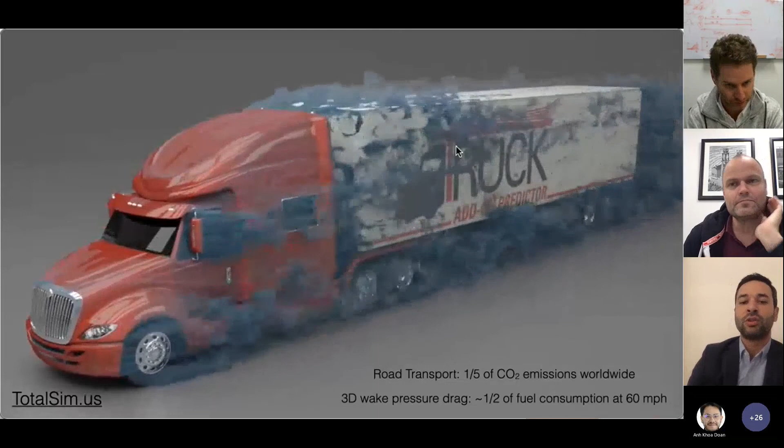So to start, the motivation was large-scale coherent structures in turbulent wakes, and specifically the automotive industry. I'm showing this simulation to emphasize the complexity of the flow around the vehicle, but also the fact that most of the drag is produced in the near wake of this vehicle at highway speeds. So we spend more or less half of the fuel to move this vehicle to overcome the aerodynamic losses due to the pressure drag in the near wake.

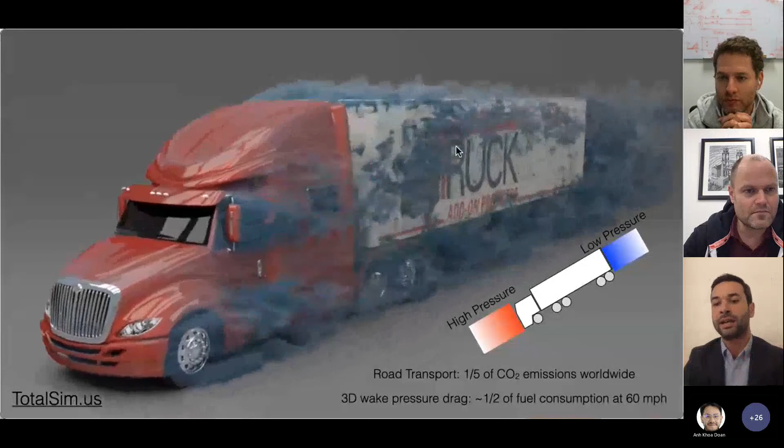And because this drag arises from the pressure difference between the front and the back, any attempt to increase the aerodynamic efficiency should alter the properties in the near wake. So in the low pressure region, we're trying to push the pressure high and equilibrate this pressure difference.

So there are different approaches. The first one is passive approaches - we improve the aerodynamic design. We can see this can improve a lot also the electric range anxiety in electric vehicles by changing the drag coefficient. Tesla was able to increase the range of their cars by 50 miles.

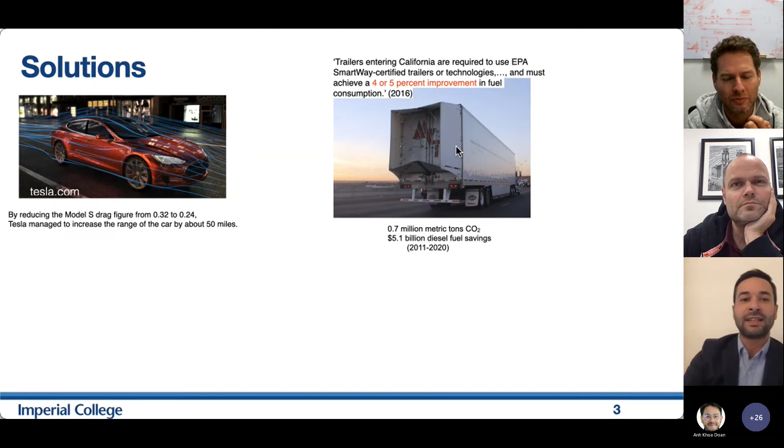In California, when I was there, I used to see these vehicles. We don't see them in Europe because we don't have these regulations yet, but they might come soon, where by law you're enforced to have aerodynamic devices in vehicles that can achieve 4 or 5% reduction in fuel consumption. And the reason these are the only devices we see on trucks is really simple.

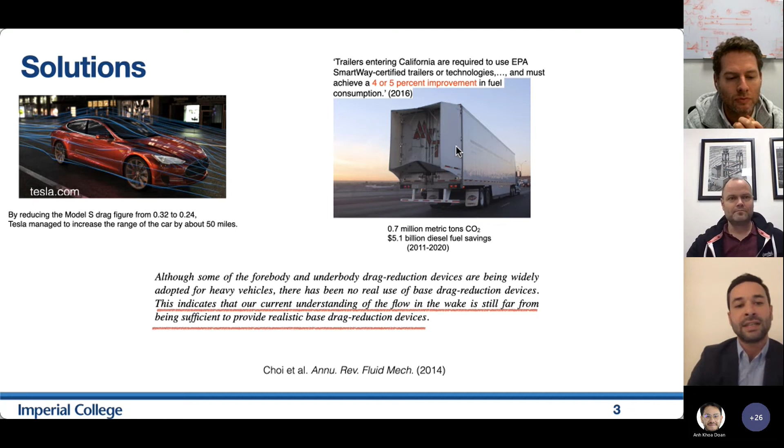It's because we cannot understand the turbulent dynamics of the wakes. This is really well summarized in a sentence from the recent review of Choi, that there is no real use of base pressure drag reduction devices due to the lack of understanding of the flow in the wake. So we cannot really have realistic base drag reduction devices.

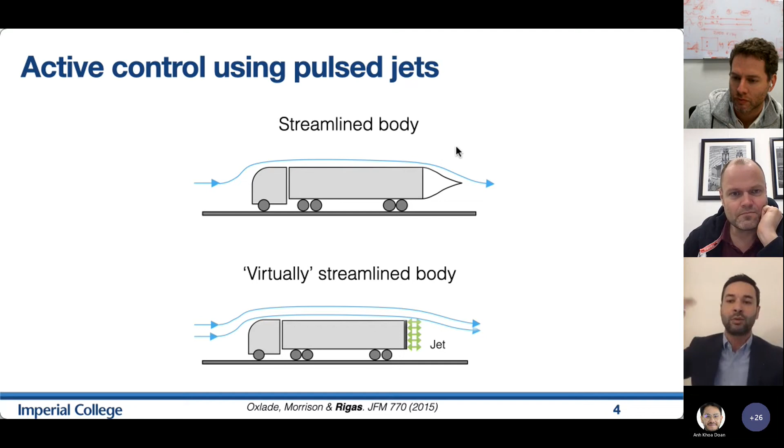So one of the approaches we attempted back when I was a PhD student, with another PhD student working there, Anthony Oxlade, was instead of using surfaces to passively streamline the body, why don't we use active control? So we use a set of jets in the rear of the car that pulsate with high frequency, high amplitude, and create virtually a streamlined body by manipulating the flow in the rear wake.

So the Reynolds number is 200,000 based on the diameter, fully turbulent regime. And we drive the speaker at different amplitudes, or jet momentum coefficients, and different frequencies.

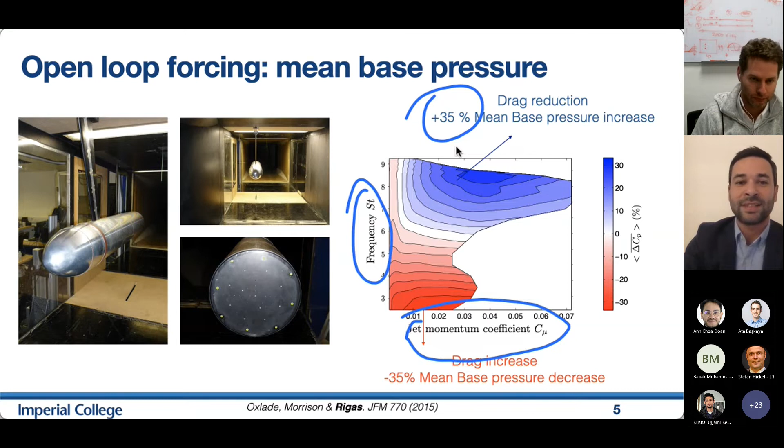When we measured the power actually required to drive these jets, we found that the efficiency was approximately 1, so more or less what we spent to drive the actuator was consumed to reduce the drag of the body. So it raises the question, is that a realistic or practical approach to reduce the drag?

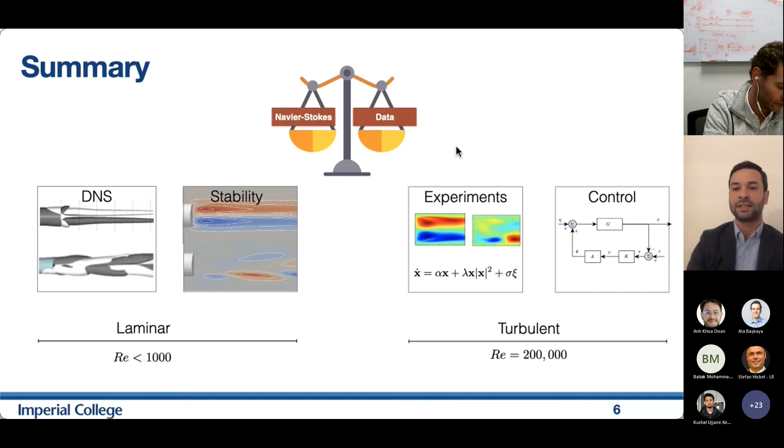So then we took a break, went back to the office, and started thinking more about the dynamics of the wake. What I'm going to show you today is our current understanding of the flow structures, which motivated some experiments we did at high Reynolds numbers, and also some more sophisticated control that we applied a few years ago and revisited nowadays with more modern techniques like reinforcement learning.

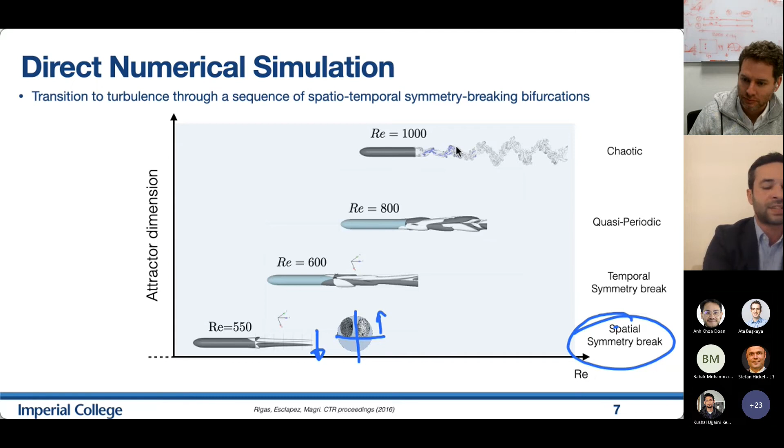The first one being a spatial symmetry break, so the wake, instead of being rotationally symmetric, is shifted towards one side. If we plot the vorticity in a plane near the base, we can see the wake has shifted off center, and there is a lateral force, such that the center of pressure, for example, would be off the center of the body.

If we keep increasing the Reynolds number, we see a second bifurcation. We lose temporal symmetry. Instead of time being a continuous direction, it becomes a periodic direction. In that case, we have the typical vortex shedding, with a peak in the near wake at a Strouhal number of approximately 0.12.

After that, if we keep increasing the Reynolds number, the flow becomes quasi-periodic and fully chaotic. And at high Reynolds number, it becomes fully turbulent.

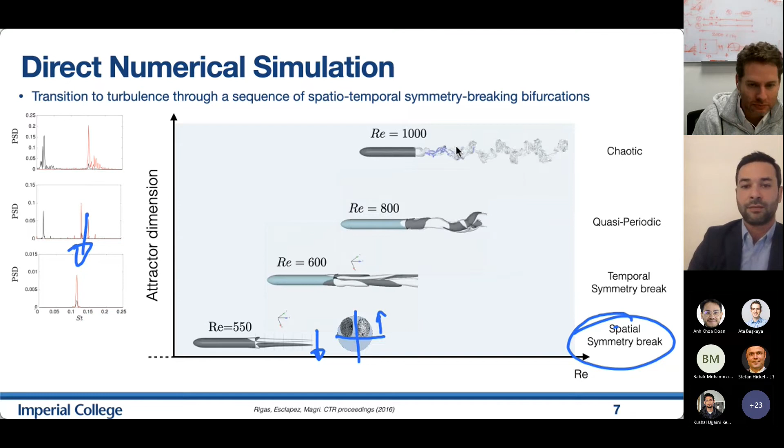To understand these regimes, we performed a linear stability analysis, starting from an operator-driven approach. We have the Navier-Stokes equations, which we linearize around a base flow. We find this base flow by solving the steady Navier-Stokes equations. These are nonlinear equations, and we use a Newton method to find equilibria known as fixed points or base flows.

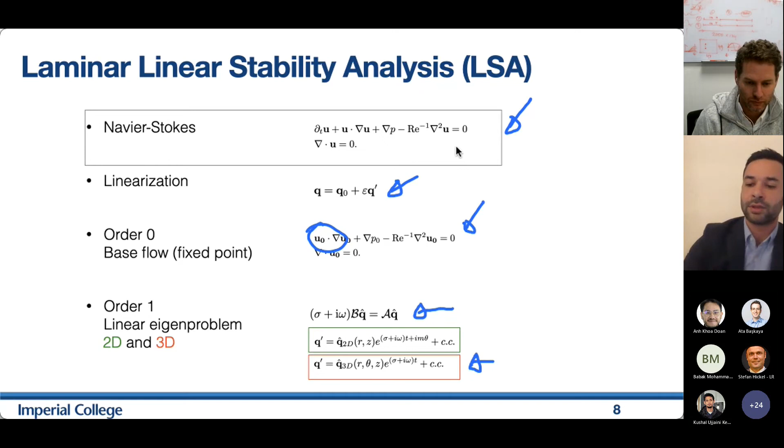Once we have such an equilibrium, we can solve an eigenvalue problem for this base flow to see if there are unstable eigenvalues associated with the symmetry-breaking phenomena. Because the flow is three-dimensional, at some point we have to solve a fully three-dimensional stability problem, so we discretize in all three directions and find eigenvalues of this large-scale system.

Starting at low Reynolds number, we have a fully axisymmetric flow. This is the base flow whose stability we examine. At some point, if we plot the spectrum, we see an eigenvalue crossing the imaginary axis. It has a zero frequency. This corresponds to a steady eigenmode, associated with a pitchfork bifurcation that breaks the rotational symmetry, which we also showed in the DNS calculations.

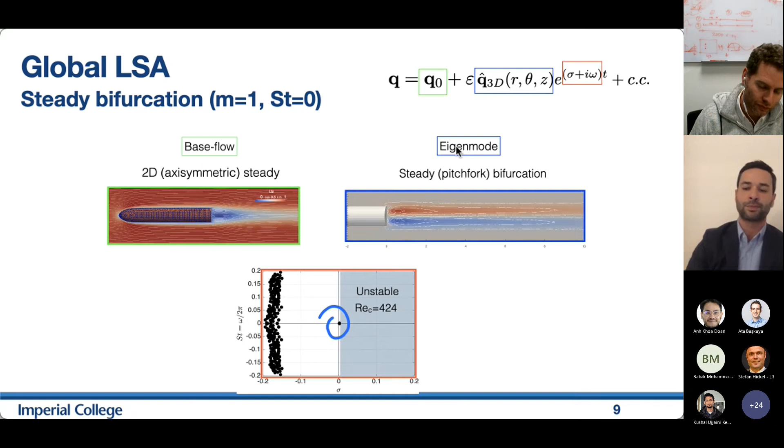What happens is that this is just the linear mode. It tells me the eigen direction of the growth of this instability, but the final saturated regime, which is steady and non-symmetric, can be found by taking this eigenmode, the unstable eigen direction, throwing it back into the solution, and iterating with the Newton-Raphson method. We end up with a new three-dimensional asymmetric solution, as you can see here.

This is a typical spontaneous symmetry-break phenomena. Originally all the solutions were symmetric, but because of the symmetry break, the original axisymmetric flow became asymmetric, breaking the rotational symmetry. This azimuthal direction in that potential well can be chosen arbitrarily based on the initial conditions for the stability analysis; somehow we have to fix this angle, otherwise it causes degeneracy. Now the fully stable state is the one we see here, and we can continue the stability analysis.

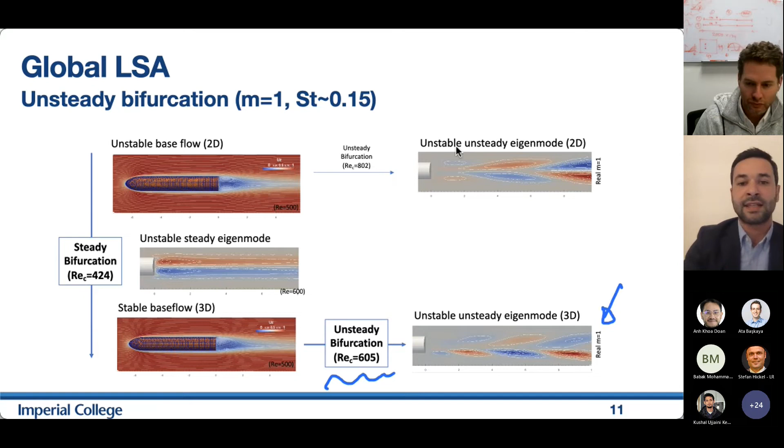Now we examine the stability of this fully three-dimensional steady flow, and we find an unsteady bifurcation at approximately Reynolds number 605. The vortex shedding mode we plot on the right-hand side is asymmetric, and it has inherited the symmetry properties of the original asymmetric base flow. Again, this is a linear eigenmode—it doesn't tell us anything about the saturated state, and this is where weakly nonlinear analysis comes in.

I'm not going to go into details about that, but what I want to emphasize is that instead of stopping at first order, which would be the linear order, if we continue at higher orders, we can get some expressions known as Stuart-Landau equations describing the amplitude evolution of the most unstable mode during the saturated regime. I want to emphasize that these are exact solutions at the order of truncation, meaning that if I throw them back in the Navier-Stokes equations, they give a zero residual given the accuracy of the truncation.

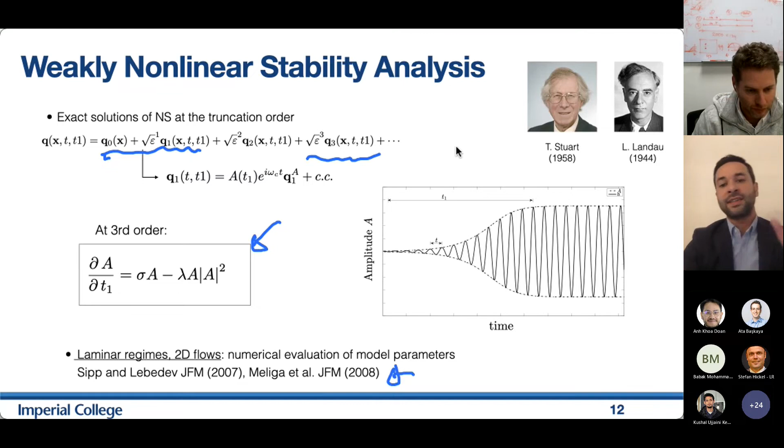Many other groups have extended these techniques to fully three-dimensional wakes like spheres. This summarizes the dynamics at the laminar regime. Unfortunately, the tools are not so evolved to take the same approach and apply it in the turbulent case.

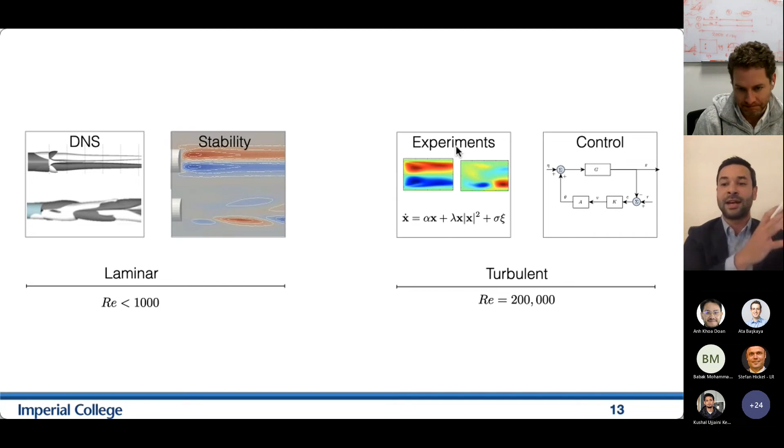So what we actually did is we went to the wind tunnel and performed a series of experiments to understand what are the dominant dynamics. What I'm going to try to persuade you today is that exactly the same transitional dynamics we see in the laminar regimes can be observed also at high Reynolds numbers. One of my PhD students, co-supervised with Jonathan Morrison, recently did a follow-up experiment of the original experiment we had performed, doing time-resolved two-component velocity measurements in the near wake.

We can see here a visualization of this flow field. The flow is fully turbulent, Reynolds number approximately 200,000, and the separated boundary layer before the trailing edge is fully turbulent. We can see a wide logarithmic region developing before separation.

And this is the pressure measurements. We can get pressure measurements, as we did originally a few years ago, in the near wake, in the base pressure, using 64 pressure taps.

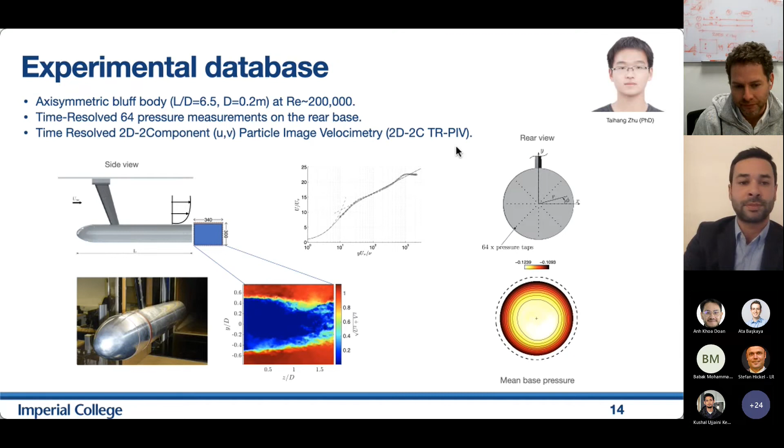So I will just summarize, or remind some of you who might have seen these results before: we started with a base pressure analysis and performed an azimuthal decomposition because we have 64 azimuthally distributed pressure sensors. We plot the power spectral density of each azimuthal mode, and we plot them in a pre-multiplied spectrum, such that the area we see corresponds to energy.

This is really convenient to understand where coherent structures happen, but sometimes it might be misleading because some peaks we see are actually not periodic solutions, but just regions of high energy. So the peaks we identify: the first one is the typical vortex shedding peak at Strouhal 0.2 with azimuthal wave number m equal ±1. This is straightforward. And we see another peak at approximately Strouhal 0.1 associated with an axisymmetric pulsation of the whole wake, the bubble pumping mode.

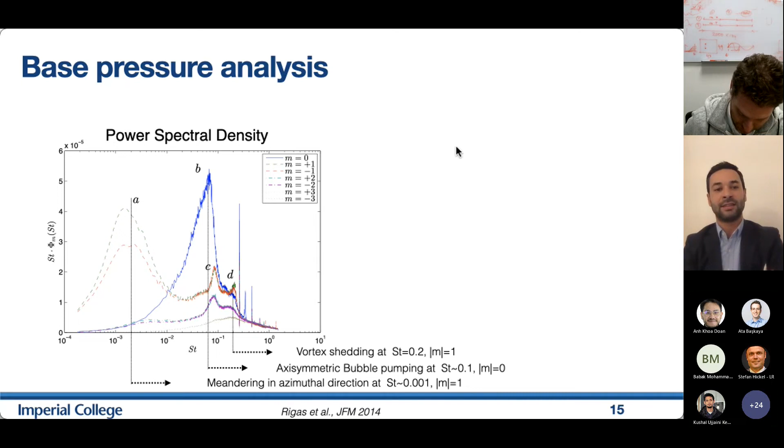Back in 2014, we also saw a strange peak at approximately 100 times lower frequency than the vortex shedding mode. To be honest, the first time we saw that peak, we said okay, there is something wrong with the experiment. So we had to change 3 or 4 wind tunnels, revise the experimental setup, try different perturbations, until we realized that there is something dynamically associated with this peak.

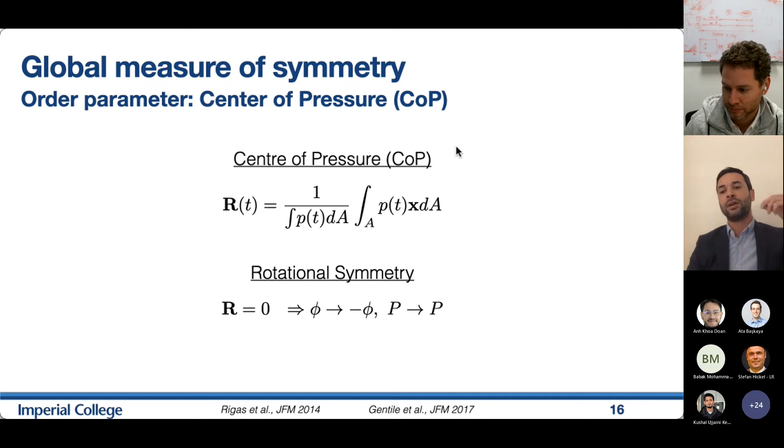So to understand where this peak is coming from, inspired by the stability analysis results, we defined the center of pressure to give us an order parameter of the symmetry break in the near wake. This has some nice symmetries: if the flow is rotationally symmetric, the center of pressure will have a zero value, meaning the total force on the body is at the center. Whereas if the value is non-zero, it will be off-center, meaning we have a symmetry break.

And we plot the PDF of that in the 2-dimensional base of the body. We were quite surprised to see that most of the time we achieve a non-zero center of pressure, which means that most of the time the wake has a broken symmetry. We said, okay, probably we're going somewhere here — these dynamics might be related to the ones observed in the laminar regimes related to the symmetry-broken mode. So to show that, we took all the snapshots of the pressure measurements and rotated them based on the azimuthal angle of the center of pressure.

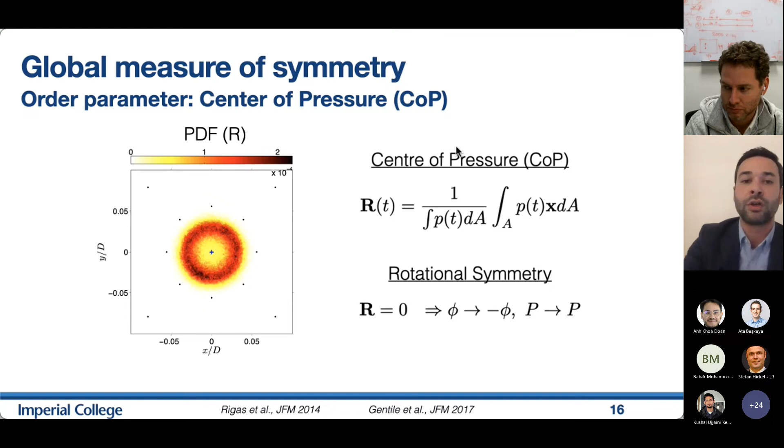So we performed a conditional averaging based on the center of pressure, the azimuthal angle of the center of pressure. On the top, we see the average pressure field, which is axisymmetric, as expected, since fully developed turbulence recovers all the broken symmetries.

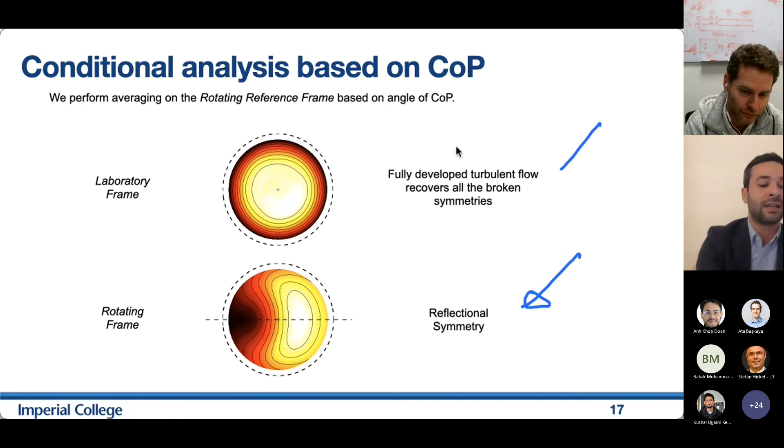But on the bottom side, we actually recover the steady symmetry break that was found in laminar regimes, but now exactly the same mode was found at high Reynolds numbers, sharing the reflectional symmetry property of the symmetry broken structure we expected to find. What happens is that this structure at high Reynolds numbers doesn't stay at a specific angle, it randomly reorientates, and due to ergodicity, we recover at the long time average the full axisymmetry in the near wake.

Why would you care about that? Because symmetry break is associated with drag. There is a direct relationship between the center of pressure and the pressure coefficient, or equivalently the total drag of the body.

So with the brown, I'm showing the radial PDF of the center of pressure, so the most probable symmetry broken direction is this one. And if we conditionally average now the base pressure, or the drag, which is a measure of the drag on the body, we see that we have a high drag, or equivalently low pressure coefficient.

Any attempt to increase the base pressure would probably imply a symmetrization technique. So we would like to achieve a zero center of pressure in order to increase the base pressure and reduce the drag.

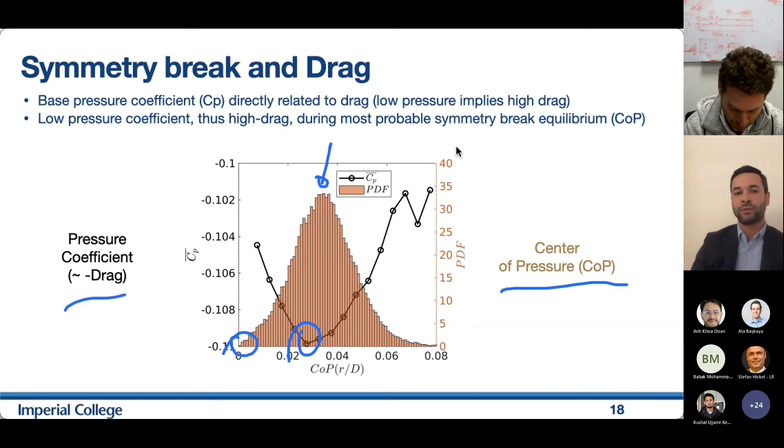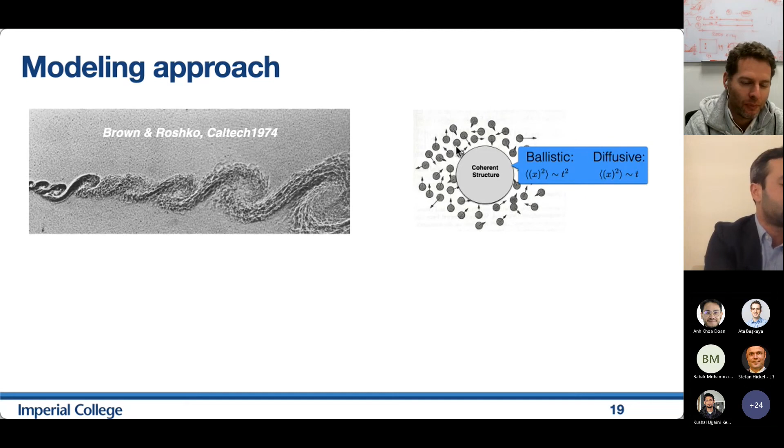These observations also motivated the modeling approach, because to perform control, we need a model as well. The inspiration came from one of the very characteristic visualizations that Brown and Roshko produced: the mixing layer that we can see in a transitional mixing layer, an instability developing and persisting all the way to fully turbulent regimes.

The only difference is that some diffusion and some stochasticity are introduced in that case. So we can think of the coherent structure, which corresponds to the symmetry broken state, as something like a large scale structure swimming in a bath of fluid. And if we think about it this way, this is the definition of a Brownian motion.

What we decided to do is take all the models that we had for the transitional regimes and add some Brownian motion to see how far we can go with that. How do these models look like?

They share the same properties as the ones from the laminar regimes. These are the weak nonlinear models, and we add white Gaussian noise, so this is a Langevin equation, a stochastic differential equation perturbed by sigma xi, which represents in a phenomenological way the influence of the stochastic turbulence produced either by the wake itself or by the incoming free stream.

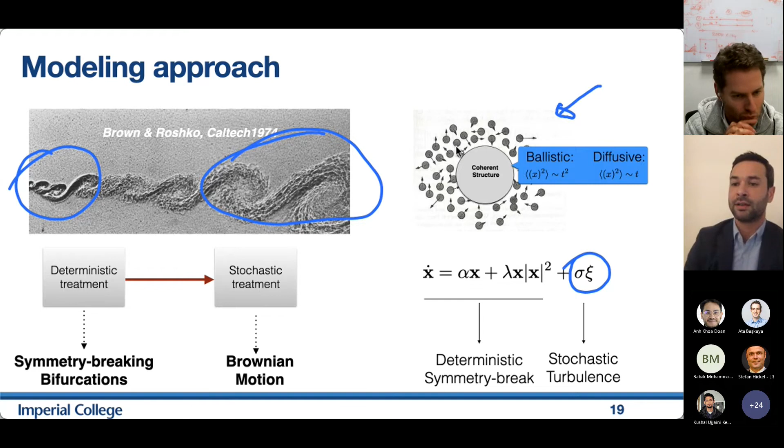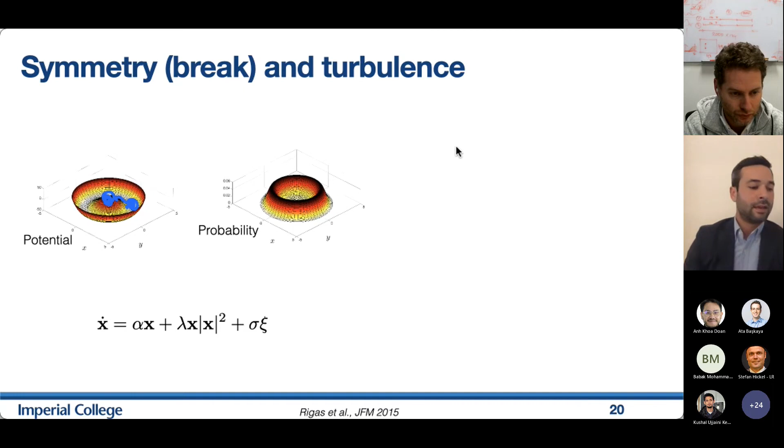In the turbulent regime, of course, the flow will never be steady, so it will be unsteady and unstable. A ball at the center of the potential would fall down, and because of the random turbulence and ergodicity, it would reorientate randomly, both in the azimuthal and radial directions, until we achieve a probability density function that is the one we have on the right-hand side.

How well do the predictions compare with the experiment? They compare quite well quantitatively and qualitatively. Here we see a comparison of the PDFs.

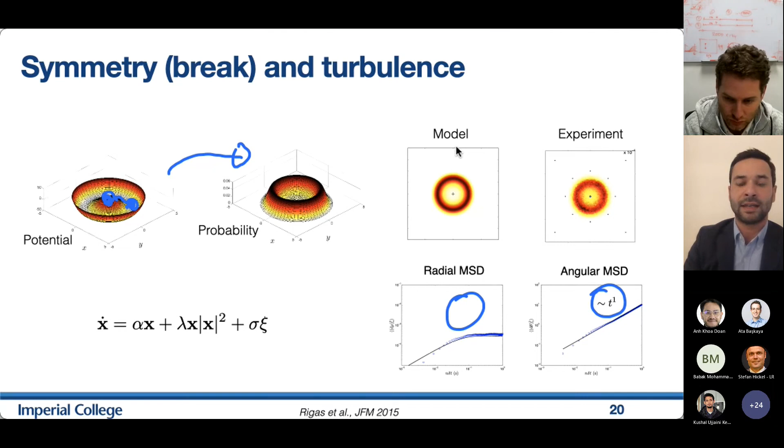Of course, in the radial direction, due to the curvature of the potential well, we cannot explore all the time scales like in the azimuthal direction, and the mean square displacement saturates, which is also perfectly predicted by these models. These models were only for rotational symmetry, but they can be extended for any kind of symmetry in the experiment, like D4 or D3.

For example, a car would have a D4 or D2 symmetry. And now, instead of multi-stability or a continuous symmetry group and a continuous solution, we can have discrete solutions or discrete equilibria that are equally explored, again due to ergodicity in our system.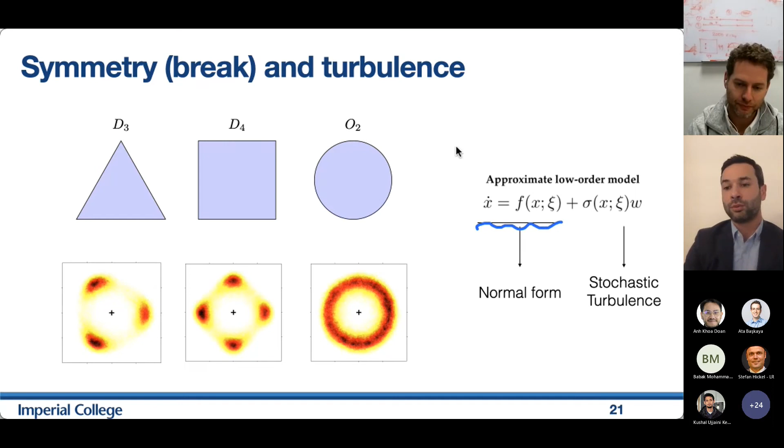Okay, so these normal forms can be derived to describe the deterministic part, either based on first principles or based on symmetries. However, in many cases we might not know the functional form of this equation, and this can remain unknown. This is where modern data-driven techniques can come in.

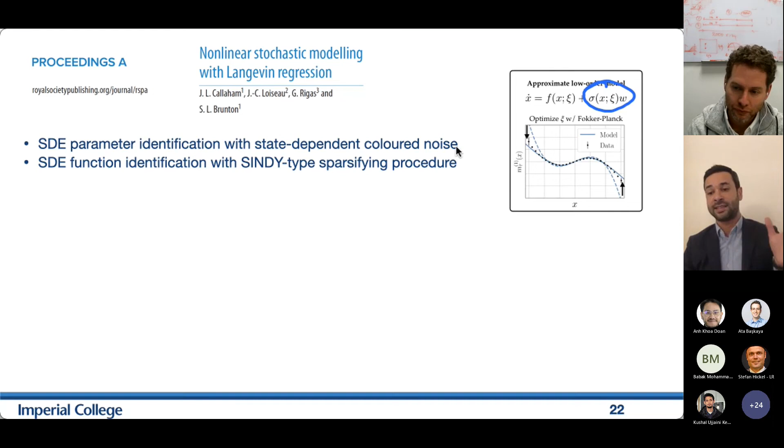Earlier this year we published a paper with Steve Brunton and his group on how to identify stochastic differential equations, but with a difference: we can have arbitrarily defined noise that we can also discover, and this noise doesn't have to be white Gaussian. It can be any kind of colored noise, and it can also have a state-dependent function.

We did that for the experimental results of the bluff body, and quite interestingly, we recovered exactly the functional form for the deterministic part that we expected. But for the noise part, we saw that we can achieve an improvement if we have state-dependent noise. We think this is something interesting that might be worth further study in the future.

Just very briefly, how we would derive these functional forms: we use a SINDy type of sparsification. We have a dictionary of all the possible polynomials that can describe this normal form, and based on a sparsifying procedure, both for the stochastic part and the deterministic part, we can choose the number of modes such that the prediction of the model matches the prediction of the data in the best possible way.

And this is all the story about the pressure data. Now I'm going to move to the velocity data and the results from the near-wake experiments.

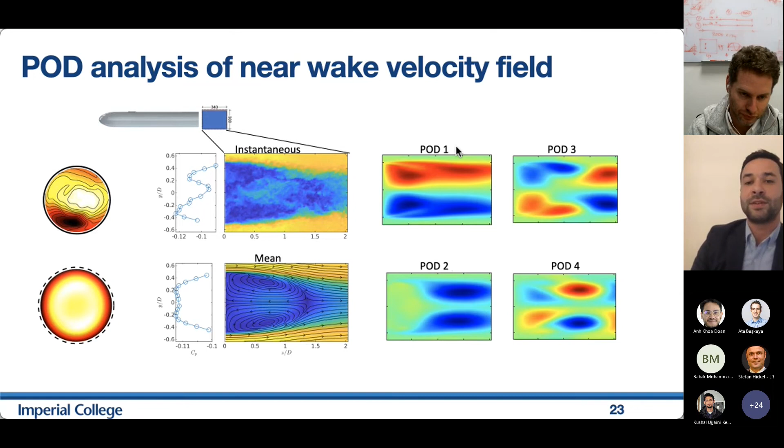So these are the POD modes. We can see that the first few POD modes are very coherent, in contrast to the completely random wake that we have instantaneously. To understand a bit more the dynamics of these most energetic coherent structures, we plot again the power spectral density of the amplitude coefficients associated with these modes.

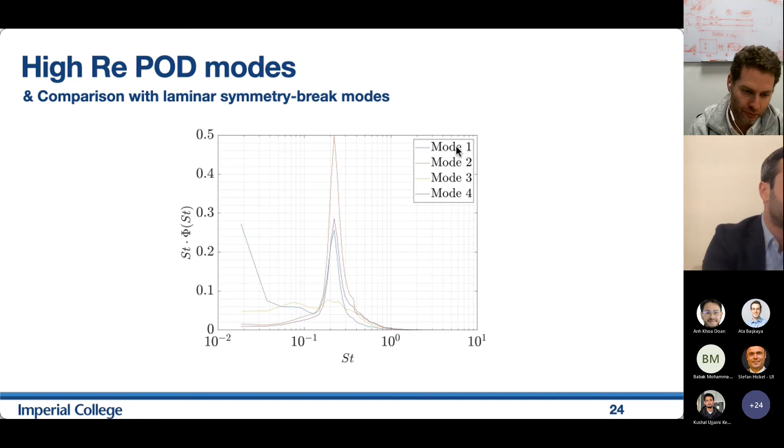The first mode, the most energetic velocity mode, actually has a low frequency component approaching Strouhal 0. This mode is visualized here, and it compares very well with the one that we found from stability analysis at the low Reynolds numbers.

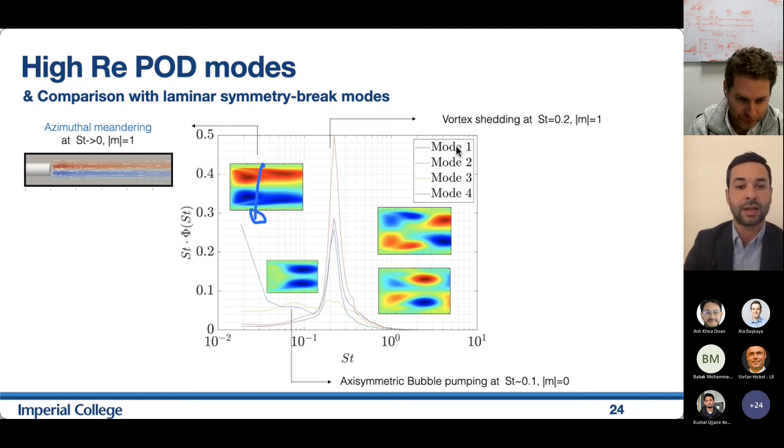The mode on the left is the one identified at Reynolds number 500. The one on the right is the one at 200,000 from the PIV measurements. We see two more modes at Strouhal number 0.2, which is a traveling mode giving rise to the Karman wake, and also the axisymmetric bubble pumping mode, which is a symmetric mode, at a frequency approximately 0.1 and a bit lower.

However, there is a caveat here: the nonlinear structures we found are non-symmetric, meaning only the linear ones are symmetric. This raises the question: do the POD modes we found actually represent the true physics of the system, since they are symmetric but the underlying dynamics are asymmetric? And of course, the answer is no.

To address that, we performed a conditional POD analysis of the velocity data. In the same way we conditioned the pressure data based on the angle of the center of pressure, we conditioned the velocity data, the state of the wake, based on the amplitude coefficient of the first POD mode, which defines in a way the symmetry break state.

Some of the time, when this amplitude coefficient is positive, the wake will be on the top side, deflected towards one side. The rest of the time it will be on the other side. If we do a conditional averaging based on this procedure, we can recover the two truly asymmetric states that can actually be observed in the nonlinear solutions of the Navier-Stokes equations.

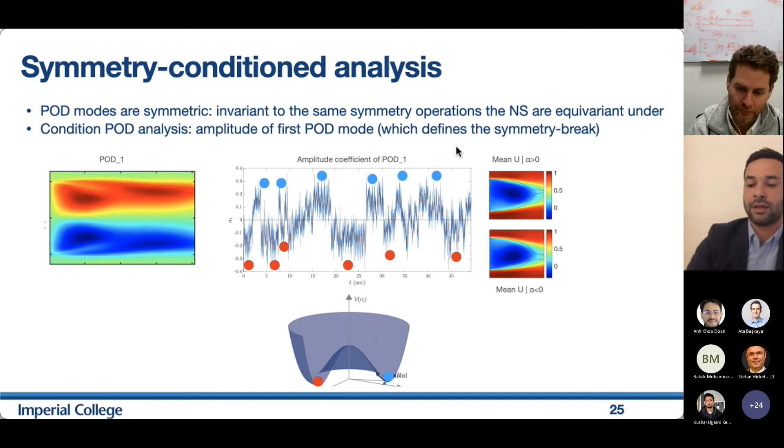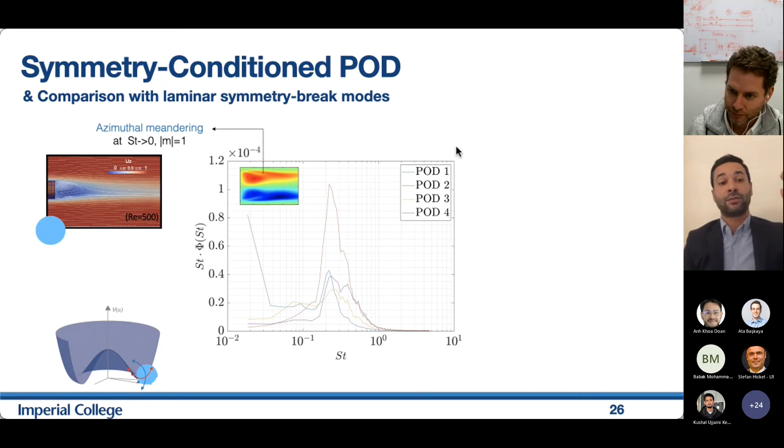We can do that also for the POD modes specifically, and here I'm going to show you the conditionally averaged POD modes based on the symmetry properties of the wake. The first one corresponds to the azimuthal symmetry break, now asymmetric. It's not very evident, but the blue is not the same as the red, and this gives rise to this tilted wake towards one side.

The vortex shedding mode is more pronounced now with the conditional averaging, one-sided because the wake has been conditionally averaged to be only on one side. So we can see the vortex shedding inherits the same symmetries, and it compares very well now with the true wake mode that we found from the stability analysis.

We can give another interpretation of the bubble pumping mode. Although the low frequency mode we found is the low frequency reorientation in the azimuthal direction, we have another diffusive time scale corresponding to oscillations in the radial direction of the center of pressure of the wake, due to broken symmetry dynamics. So we can think of the bubble pumping mode as a radial meandering of the whole wake, stochastically exploring both the azimuthal and radial directions due to broken symmetries.

So that summarizes our most recent understanding of turbulent wakes using both pressure and velocity measurements. The most important part is the persistence of laminar symmetry-breaking instabilities into fully turbulent regimes.

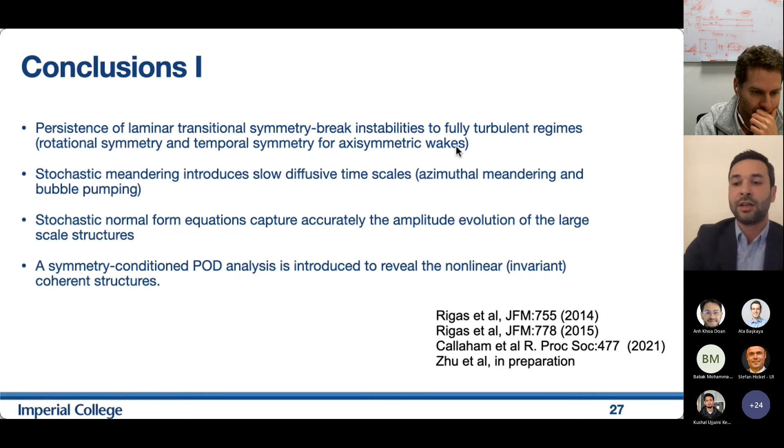The last part, the symmetry-conditioned POD, motivates the next part of my talk, which one of my other students, Simon, developed a sophisticated way to include any kind of symmetry, creating what is called the symmetry-aware proper orthogonal decomposition analysis.

The symmetry we had before was only rotational, but there are systems with many other types of symmetries, continuous and discrete, and these cause serious problems for modal decomposition methods.

So we're going to use POD implemented with autoencoders, using an encoder-decoder type architecture. We can prove that if we use a linear neural network with just one layer, this is exactly equivalent to performing POD. However, we can also go to the nonlinear regime, doing more sophisticated or compressed analysis of the flow by replacing the linear neural networks with nonlinear ones.

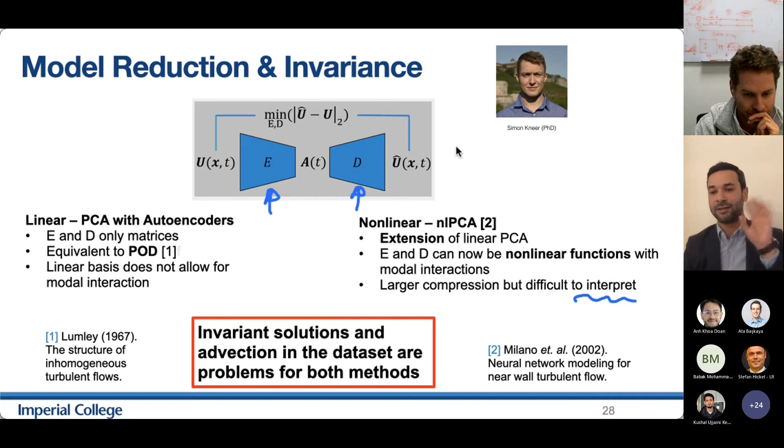However, in that case, we lose some interpretation of the modes because we don't have specific modes associated with these structures.

So I'm going to define what we call an invariant solution, and this is what gives trouble to POD. Specifically, we have a set of partial differential equations, like on the left-hand side in compact form, that are equivariant under a symmetry group gamma. The right-hand side will satisfy this kind of relationship, giving rise to invariant solutions for the state U.

So meaning that if I have a symmetry, like a rotational symmetry, I can take my nonlinear solution, rotate it, and find exactly the same, and it will still be a solution of my system.

However, in POD, because of the ergodicity and exploration of all these possible symmetries, what ends up being the result does not correspond to the original nonlinear solution U. So somehow we would like to take into account the symmetry transformation in the POD analysis that I will show you now.

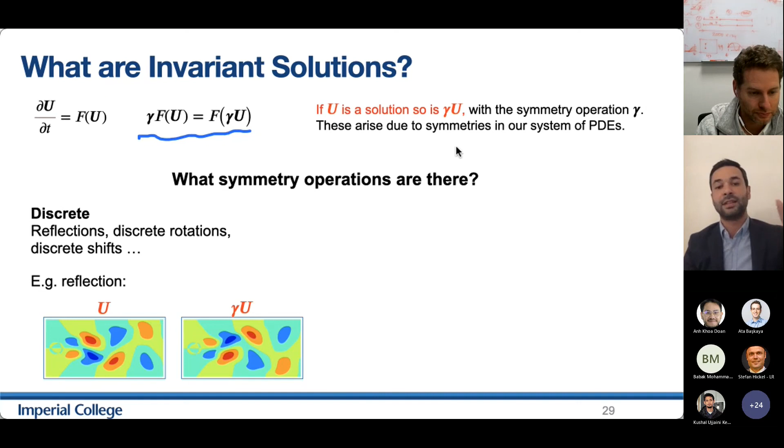These two types of symmetries for gamma correspond to discrete symmetries like reflections, rotations, or shifts. For example, here in the cylinder case, we can see the flow state reflected in two different instances in time.

Or we can have continuous symmetries. I showed you earlier rotation, but we can have also translation, which can give rise, for example, to traveling waves if we have periodic directions. Here is a snapshot for the Kolmogorov case, which I will show a bit later, of the same state translated by pi or pi over 2.

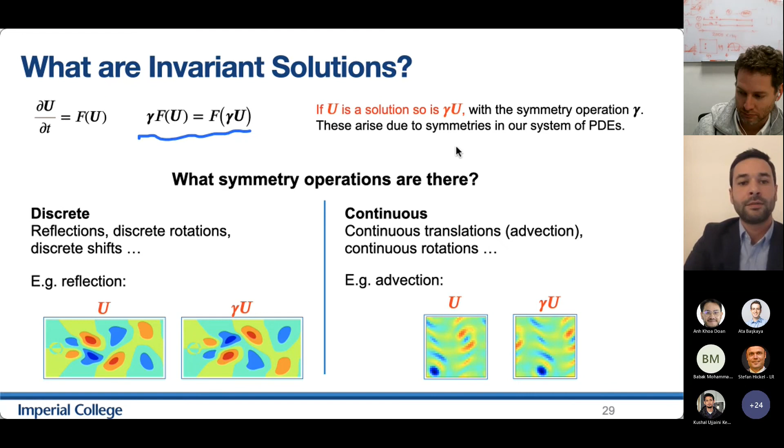Why do invariances cause a problem for model reduction techniques like POD? First, they bloat the latent space, in the sense that symmetry-transformed states which are equivalent get encoded in different locations in phase space. We don't need that, because it gives us much higher dimensionality in our system.

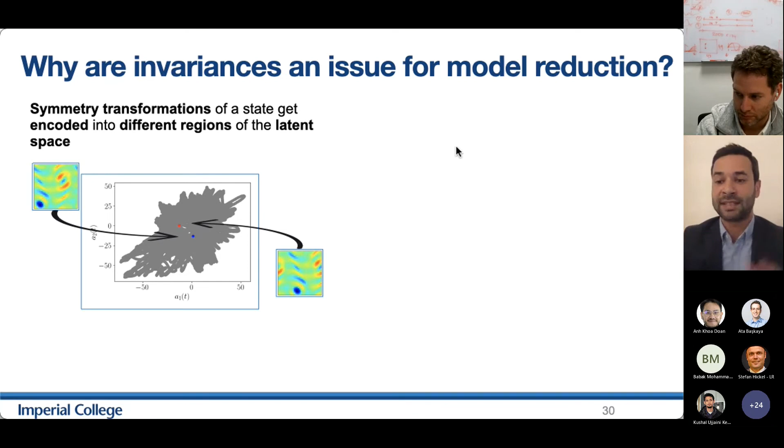But most importantly for us, trying to understand the underlying physics, is the fact that we lose interpretability when we do POD analysis in the case of symmetry. Why? Because when we have a periodic direction, we can prove that the POD modes become Fourier modes, and when we have symmetries, the POD modes also inherit the symmetries that the original system is equivariant under.

Simon actually came up with a really sophisticated yet simple way to do that with the autoencoder architecture. So what we're doing is we start with a snapshot X, and we encode the optimal shift. We discover it - this is a shift S that we have to translate the whole state in a periodic direction, for example in X, such that the reconstruction is optimal.

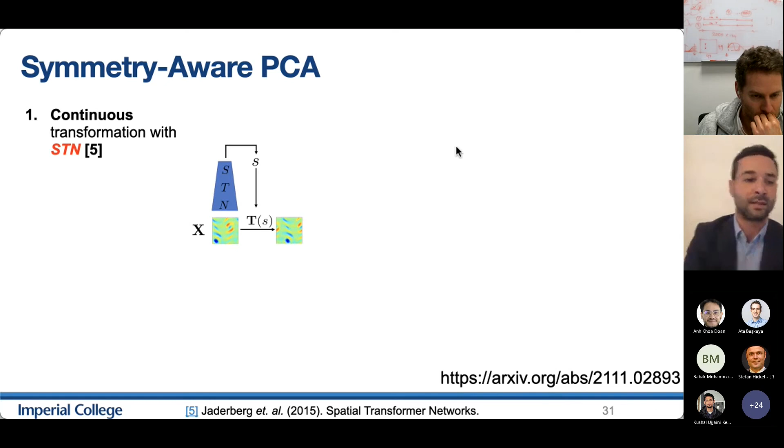For the discrete symmetries, we replicate the same autoencoder architecture by creating a set of Siamese branches. If we have a set of discrete symmetries, we produce, by applying the same symmetry group to the snapshot, a replication of all the possible states. During training, we pick every time the one that is closest, that gives us the lowest reconstruction error.

So then we just reconstruct back in the original space because we know which branch was selected and also what was the shift. We back propagate the reconstruction such that we minimize the weights of the encoder-decoder, and simultaneously we find the optimal shift such that the solutions become invariant in the continuous directions, but also invariant with respect to all the discrete solutions.

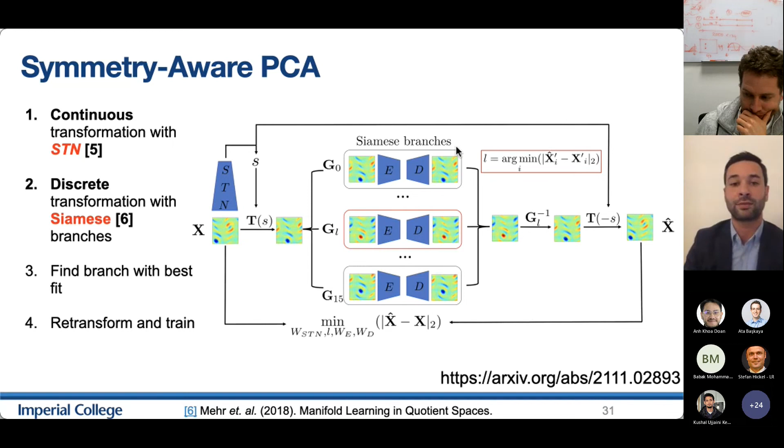So at the end of the day, the structures we discover here are invariant under the pre-specified symmetry group of operations that we have defined at the beginning of the autoencoding.

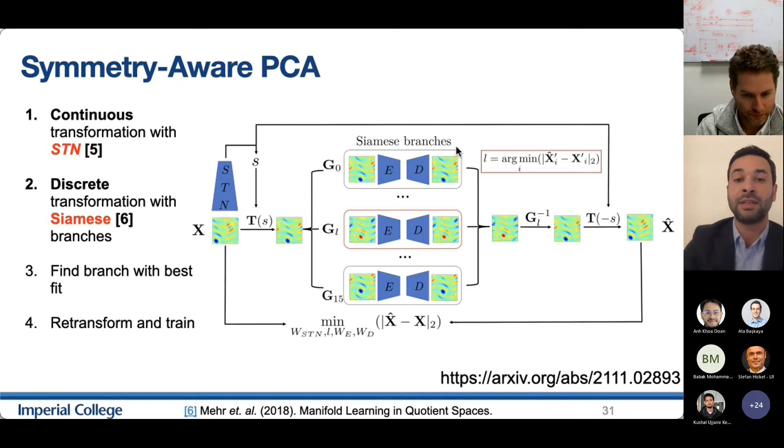We will demonstrate that in the Kolmogorov flow, which is a canonical case for studying rare events and very weak turbulence. It has periodic boundaries in X and Y, and here you see a rare event where the equilibrium solution is shifted after the rare event happens, in a completely different location, by approximately pi. It has many different invariances due to discrete symmetries and also continuous symmetries.

So the number of discrete symmetries is 16, because of the symmetry of the forcing and the rotation symmetry.

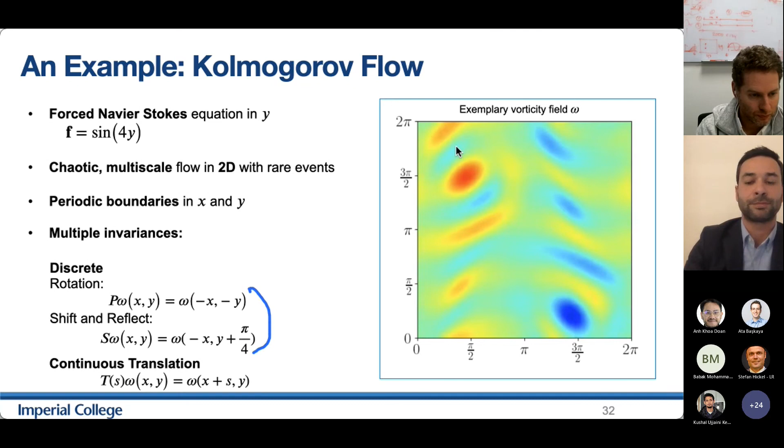So during the encoding and the decoding, the architecture would tell us which of the states were explored every time the encoder was shifting things, such that solutions become invariant in this phase space.

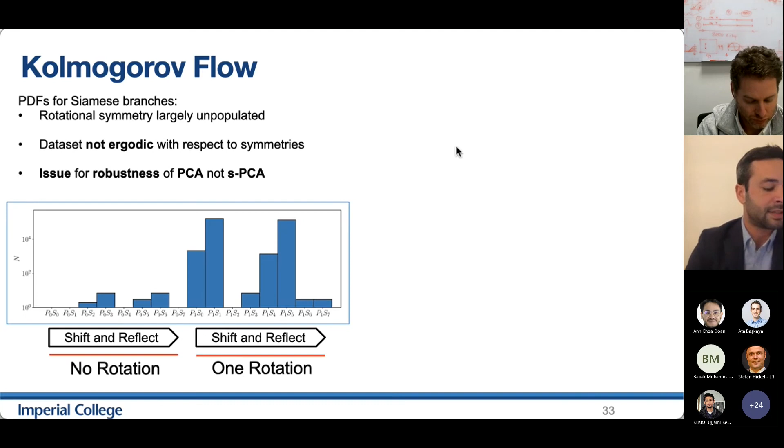This is the shift that the autoencoder is applying every time a new snapshot comes in, such that all the snapshots are aligned in the reduced space. There is a direct relationship, and we can prove that this method we're proposing is exactly equivalent to the method of slicing as well.

The interesting part is when we compare directly the modes from the linear symmetry-aware PCA and the normal PCA. As I told you, if we apply normal PCA, the modes are just Fourier modes in the x direction, whereas they become physical modes in the SPCA framework. Specifically, mode 1 corresponds to an equilibrium solution that can be found also based on operator-driven approaches, like dealing only with exact solutions of the Navier-Stokes.

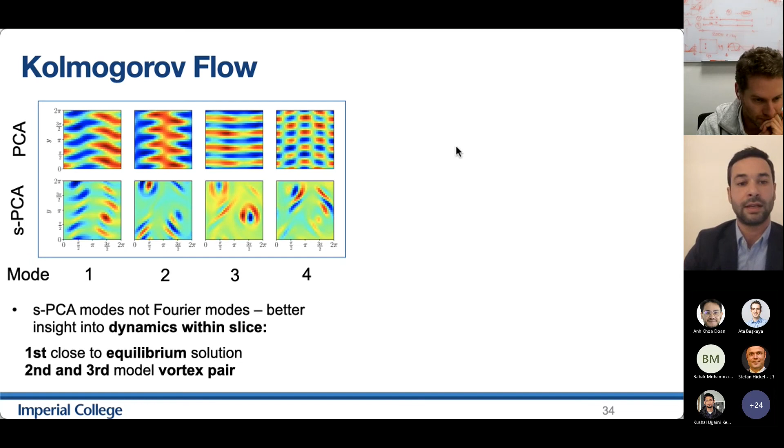And the second and third modes are actually vortex modes that, again, resemble some of the exact coherent structures that can be found by Newton methods using the full nonlinear Navier-Stokes equations.

How does the projection in terms of energy compare between POD and SPCA? Actually, when we're using the symmetry-aware framework, the SPCA, and we project the reconstructed flow using only two symmetry-aware modes onto the original PCA modes, we can see that we recover approximately 100 PCA modes. So if we take into account the symmetries of the problem, we can drastically reduce the dimensionality of the system, and this also results in better interpretability of the results.

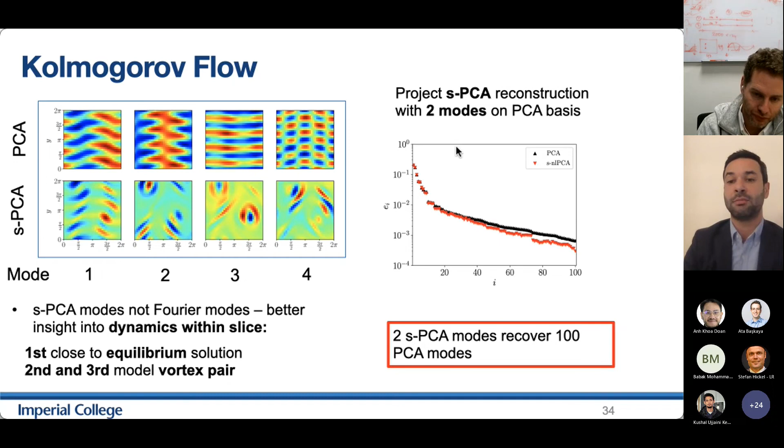If we include also nonlinearity in the autoencoders, we lose a bit of interpretability because we cannot plot modes, but we can see that we more or less match exactly the energy of at least the 100 PCA modes with just two nonlinear modes.

This summarizes the second part of my talk about the symmetry-aware autoencoders that were inspired by part one that I showed you. Simon has uploaded the code on GitHub for this method, and there is also an associated arXiv paper that I invite you to have a look at if you're more interested.

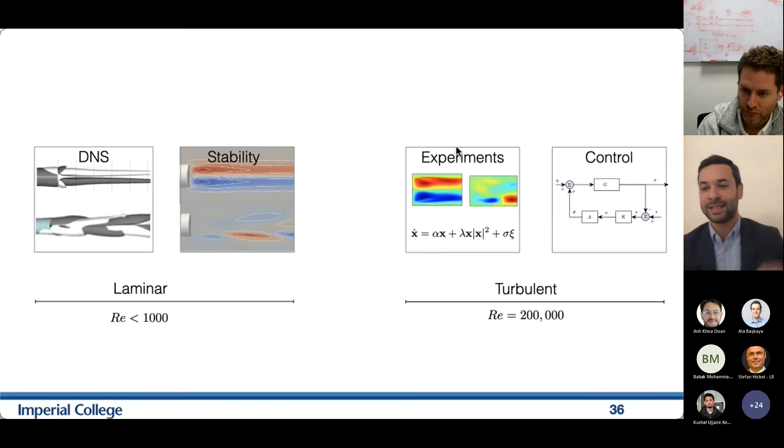The last part of my talk will be about some recent attempts on control, again inspired by the old results that we had. The problem with realistic application of flow control is the partial observability we have. We're trying to control a fully three-dimensional and turbulent system, but when we're trying to sense it, we have only surface information, like pressure measurements, for example.

We will use already existing devices that we have implemented in a variety of vehicles, like active surfaces or spoilers, to try to move them, in this specific case, to remove or attenuate the symmetry breaking dynamics.

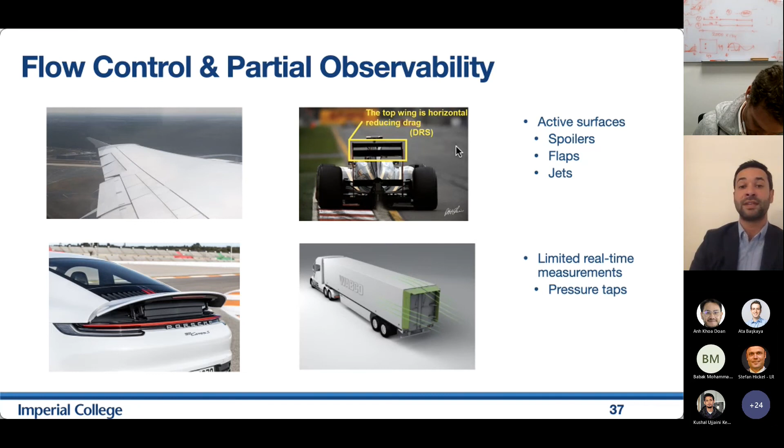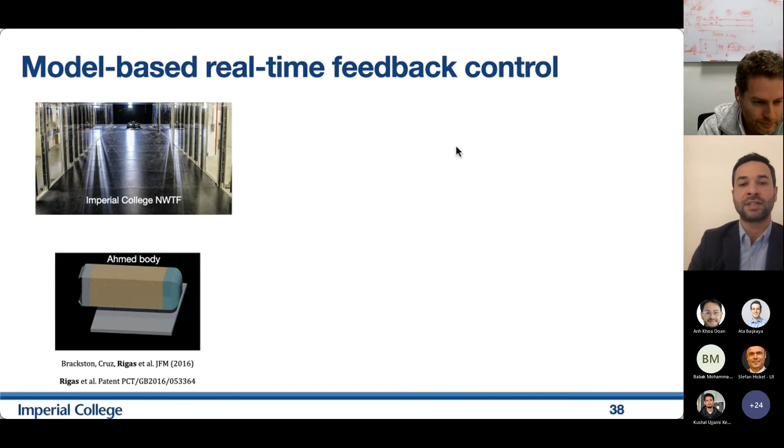So we did that in the new facilities at Imperial College. We designed a canonical bluff body known as the Ahmed body, and went back into the wind tunnel. We had two flaps on the sides, left and right, to kill the bistability, the steady symmetry break that occurs in the presence of Z2 symmetry.

We used the original models, we had derived the stochastic models, and we also took the actuation into account there. Using standard control methods, we designed linear controllers to attenuate the bistability observed in these wakes.

It was the first time we realized that technique was very efficient. We spent only a quarter of the energy to drive the actuators in order to gain this 3% drag reduction. And of course, 3% does not sound like a lot, but still it would be at the margin of implementation in a realistic case.

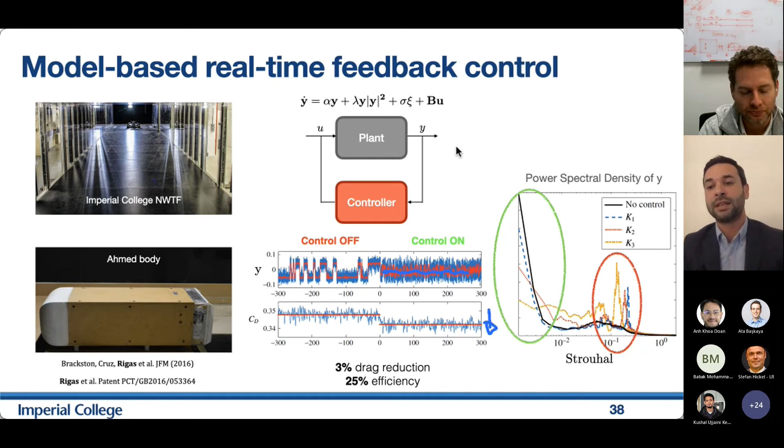So nowadays we're following a shift in paradigm, using reinforcement learning to find controllers in a completely model-free way. Although reinforcement learning sounds completely different, it's actually a sophisticated way to find feedback laws, feedback controllers, by interacting with the system, which in the reinforcement learning community they call the environment.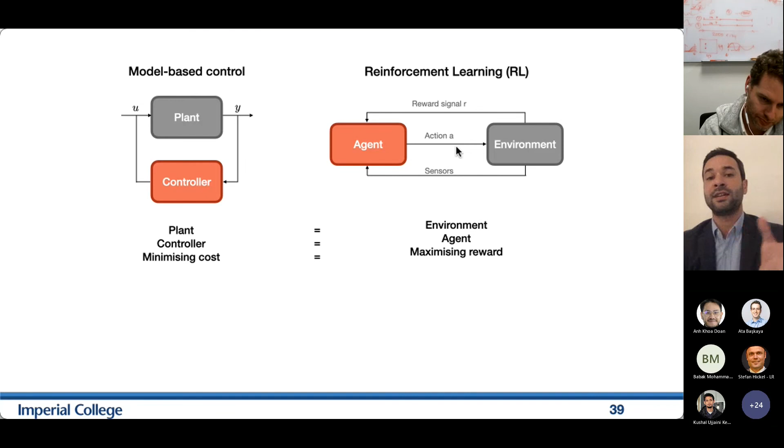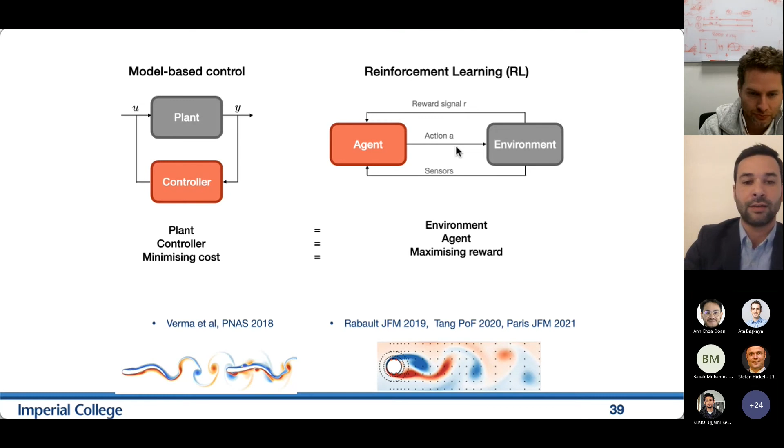There are many successful applications over the last few years that have shown promise for a variety of applications, including drag reduction for low Reynolds numbers, as demonstrated by Rabault et al.

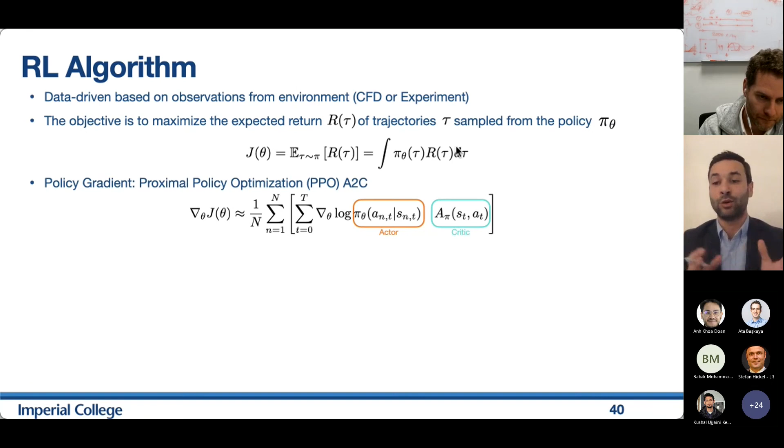So we're using an off-the-shelf algorithm called PPO, proximal policy optimization, which mainly relies on two neural networks. These define the policy that we have to find, and the critic, which is there to optimize the policy to achieve an optimal reward, or in this case, minimal drag.

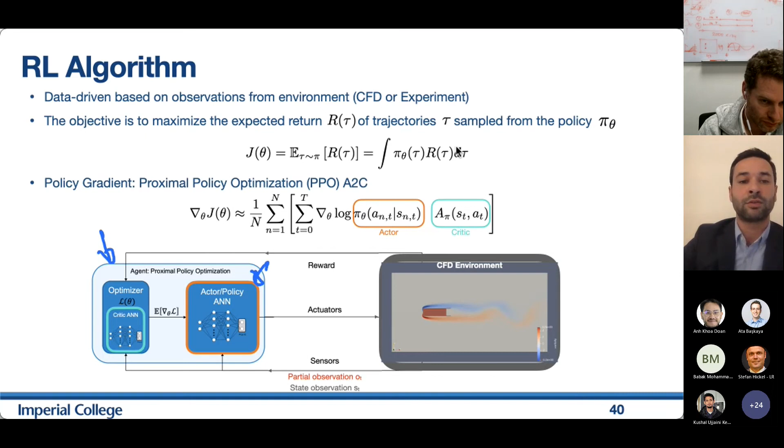The actor, seen here, is a neural network that acts as a transfer function between the sensors and the actuators, trained through the critic artificial neural network. We interact continuously with the environment so the critic can train something usable in a feedback loop, receiving information from the sensor and driving the actuators.

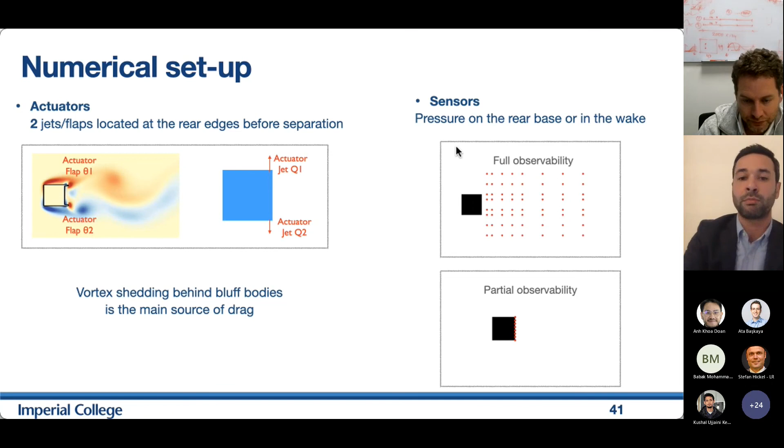I will demonstrate this using two flaps for a laminar case, or two synthetic jet actuators. I will examine two cases: one with full observability, where we have sensors everywhere in the wake, and a more realistic scenario corresponding to partial observability, with surface pressure measurements only on the base.

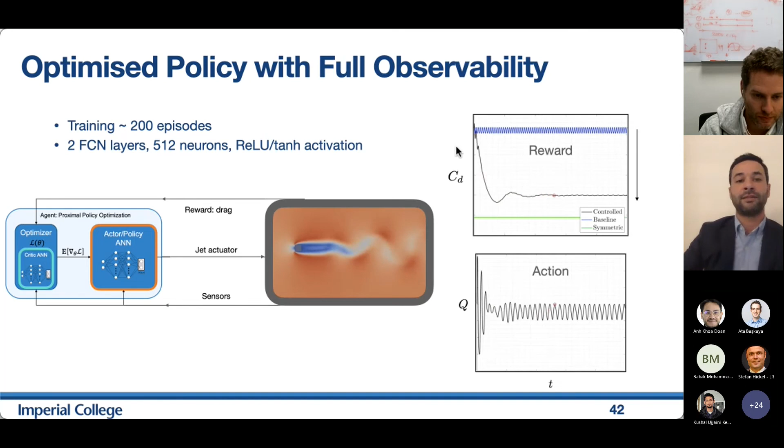If we train the policy with full observability, we can actually fully stabilize the wake. We can see the drag reducing approximately to the symmetric flow state, and the actuation is driving the wake in such a way that it becomes more or less symmetric.

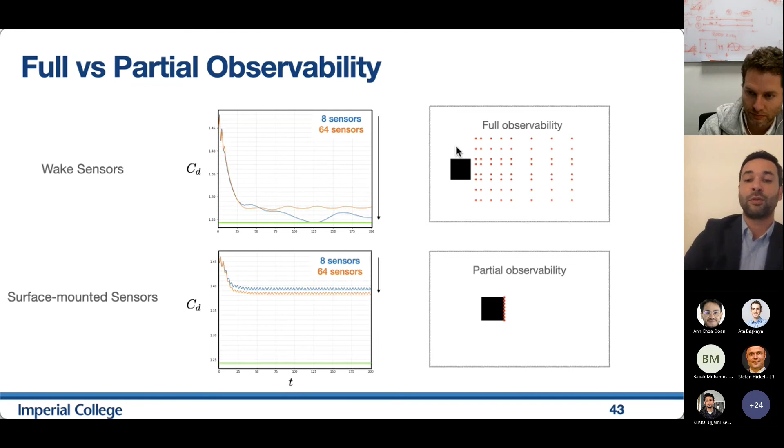We can have 64 sensors to achieve full observability, but even with 8 sensors, we can actually gain similar results. However, when we have only a few sensors on the base of the body, the drag reduction we can achieve is much, much lower, and we have lost a lot of the performance we had with full observability. There is a specific reason for that.

This goes back to the theory of reinforcement learning, and specifically the underlying assumption is that we need full state information, meaning I need to measure all the states at the present in order to predict the control action in the future. However, when I have only a partial set of observations in the present, I cannot predict what is the optimal action to take in the future to achieve stabilization.

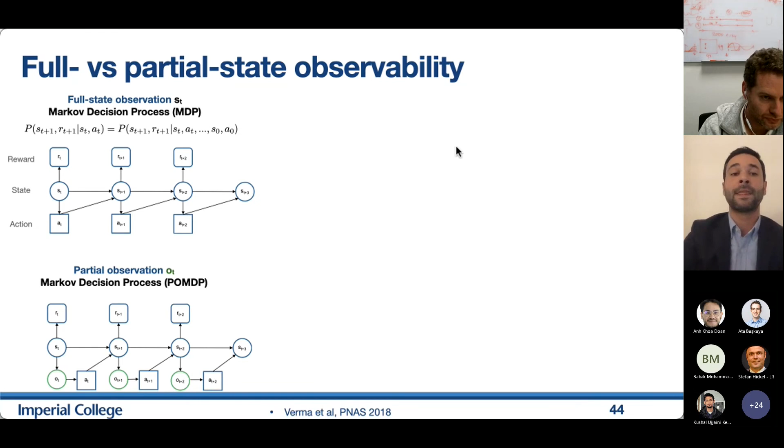This can be bypassed easily using Takens' delay embedding theorem, which tells us that I can reconstruct the full state using partial observations by using a few delayed observations in my input signal. Nowadays in the control and machine learning community, this can be done in a more sophisticated way using recurrent neural networks like gated recurrent units, LSTM, or even Echo State networks, which optimally tune and find the dynamics of the recurrence or past history that has to be implemented in the model, such that the state and future actions are predicted in an optimal way.

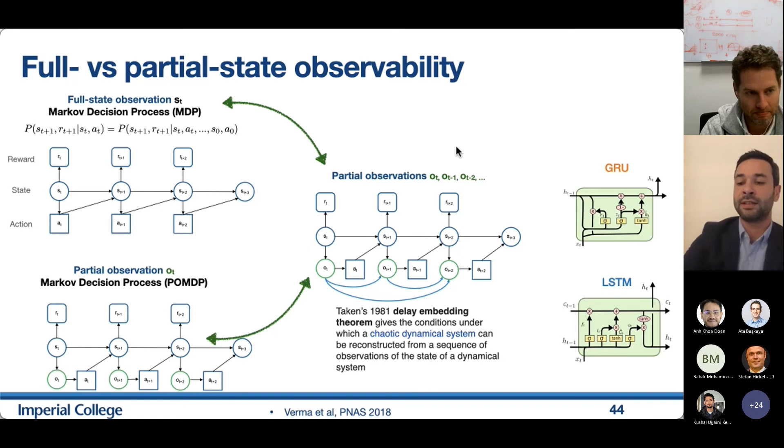This is the last slide I will show you today, and this is one of my attempts to understand reinforcement learning and not think of it as a black box or magic that just gives you a controller. There is actually a nice correspondence with control theory, and once you include recurrent neural networks or delayed observations, the actor we're discovering has exactly the equivalent interpretation as a nonlinear digital filter that we would find with standard control techniques. So in that case, we can use all the control techniques to understand the performance of the controller.

The most typical one is frequency response analysis. So I see my actor as a transfer function, as an input-output system. I apply a harmonic signal as an input frequency, and I record the output frequency across all frequencies. I see that the main response is along the diagonal, which tells me that if I force at a frequency, I get that specific frequency as output, which implies linearity.

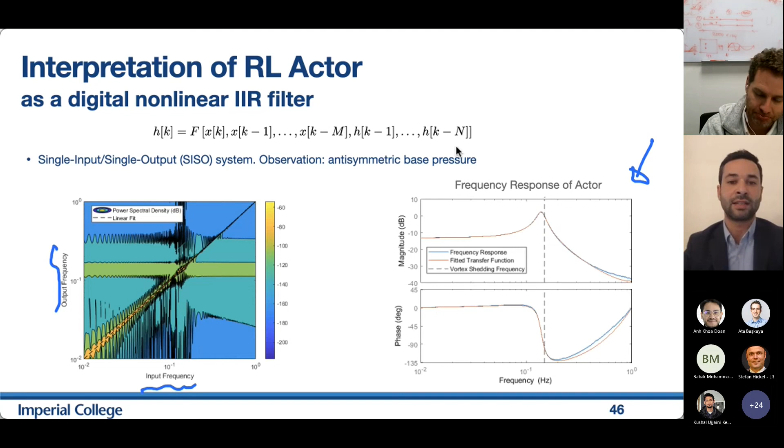If I plot the amplitude and phase associated with the maximum linear response, I can get a transfer function or a Bode plot describing the discovered nonlinear controller, which is parameterized with a neural network and is known as an actor in this case. Specifically what we discovered is that we can fit a second order typical linear system, and we can see that it matches very well the response of the nonlinear neural network.

So these are some conclusions from the third and last part. But what I'd like to say as a comment is that we didn't do that for more complicated cases because we couldn't afford it computationally. I had to run 200 simulations to get these optimal controllers using DNS calculations. For turbulent regimes, you might need even more simulations, and this is completely intractable, especially for the complex regimes we're looking at.

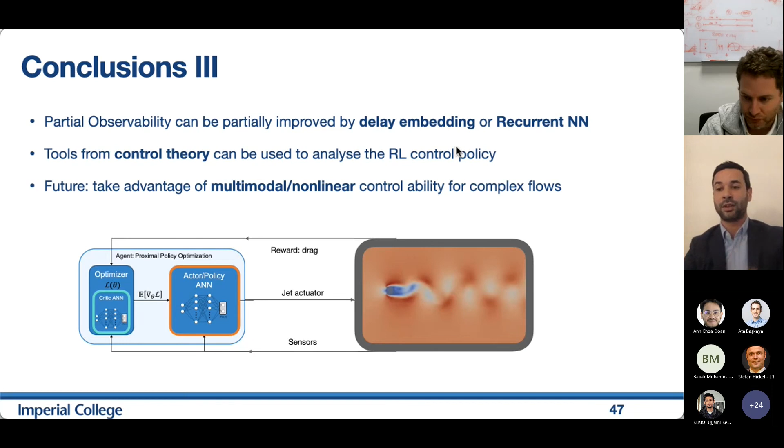So the whole idea in the future, and what we're working on now, is to go into the wind tunnel and replace the environment, instead of a numerical simulation, with the actual experiment, and obtain the interaction—the response, the action and the response of the environment—in real time, in a fraction of a second, and do the training in real time in the wind tunnel.

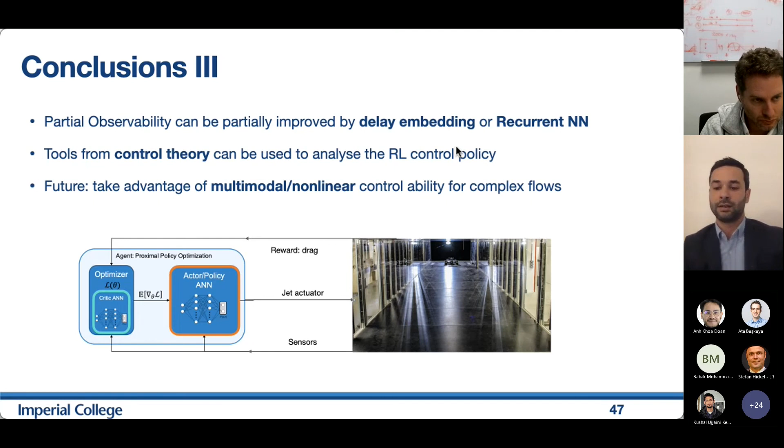So with that, I'd like to summarize. We mainly showed the persistence of laminar coherent structures at high Reynolds numbers, using linearised Navier-Stokes operator-based approaches. At high Reynolds numbers, we used a data-driven symmetry-aware PCA type of analysis, which also inspired us to develop the symmetry-aware method I showed you. Finally, our recent attempts at understanding recurrent reinforcement learning for controlling bluff body wakes.